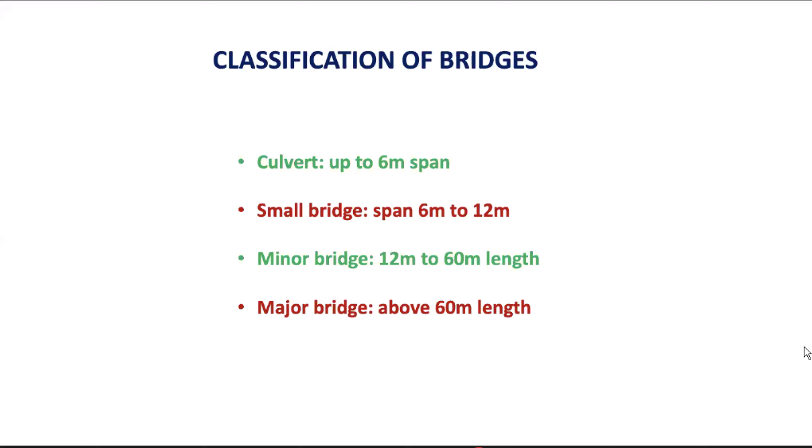Okay, what are the basic types of bridge superstructures these days? These days means as of now, latest. In the past, not so common now, but we do have some slab bridges, which are RCC or PSC slab, like a solid slab, as in a building. You have a slab which may span from, let's say, 5 to 10 meters in the case of RCC, maybe 10 to 15 meters in the case of pre-stressed concrete.

But somebody may wonder why not more than that. You can have more than that, but the cost goes up. Material quantities increase heavily. Earthquake effects also increase because the inertial mass increases. So it's because of those practical reasons that we'll go for a solid slab only for spans between about 5 meters to 15 meters, RCC or pre-stressed concrete.

PSC means pre-stressed concrete. If we have spans larger than that, and if we still want a neat and clean looking slab, then we will go for something called voided slab superstructure, which may be reinforced concrete or pre-stressed concrete. We will see some pictures of all these.

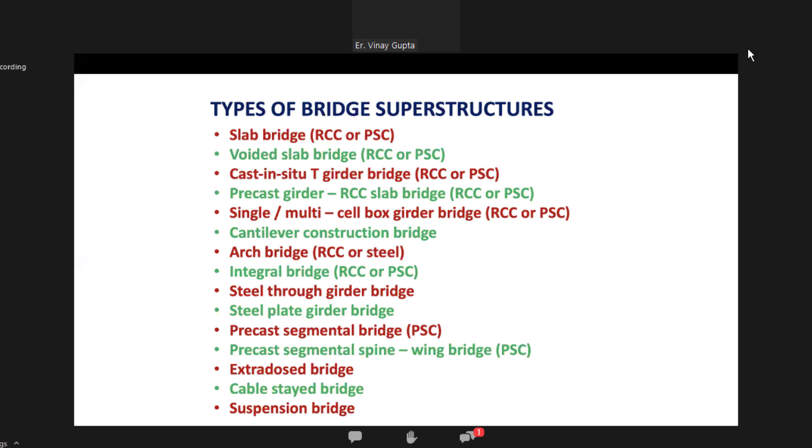If we have larger spans than 15 or 20 meters, then we can go for cast-in-situ T-girder bridge. Cast-in-situ is one category where you really put a shutter and cast, which may have RCC T-beams or pre-stressed concrete T-beam slab together. Alternatively, it can be a precast girder topped with RCC slab deck. The precast beam may be in RCC or pre-stressed concrete, but the slab will typically be in reinforced concrete, RCC.

We can have single or multi-cell box girder bridges, which again can be in RCC or PSC. We can have cantilever construction bridges where we cannot put shuttering and the spans are large. So when the shuttering cannot be placed and the span is large, we have cantilever construction. We will see some pictures as to how they are built up and constructed.

If you're an aesthetic lover, then we can have arch bridges for larger spans especially - they look very good, and can be in reinforced concrete or steel. We may have an integral bridge - integral meaning it is something like a building frame where the superstructure is monolithically connected to the substructure without any pier cap and bearings; that becomes an integral bridge, which can also be RCC or PSC. We can have a steel through girder bridge, like a truss bridge, which is all open web structure, or we can have a steel plate girder bridge, which is a solid plate having a top web, a top flange, bottom flange, and a plate with stiffeners, etc.

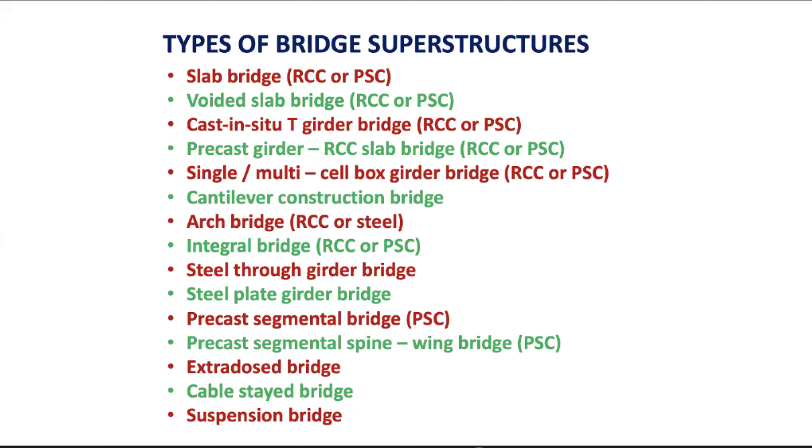We can have extradosed bridges. Here we talk of cable supported bridges. In cable supported bridges, there are three categories: one is extradosed, other is cable stayed, which you mostly hear about, and third is suspension bridge for larger spans. In terms of span range, extradosed bridges are good for about 50 to 200 meters. Cable stayed bridges are good for about 200 meters to 1000 or 1200 meters. Suspension bridges are good for anywhere around 500 to 2000 meters. Today we have a bridge with a clear span of 2 kilometers, or 2000 meters.

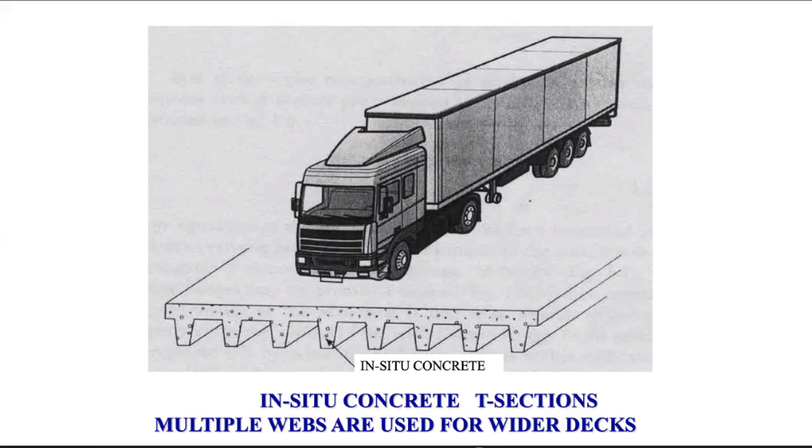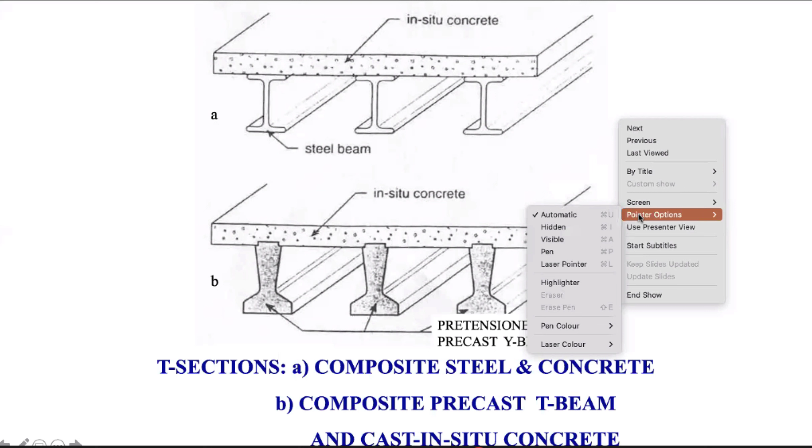This is precast concrete below, or let me put it to options. Yes, if you see below, it's precast pre-stressed concrete beams, topped with in-situ deck slab, as I said, always in-situ deck slab. And this is a steel beam bridge where you have I-girders or plate girders topped with RCC deck slab.

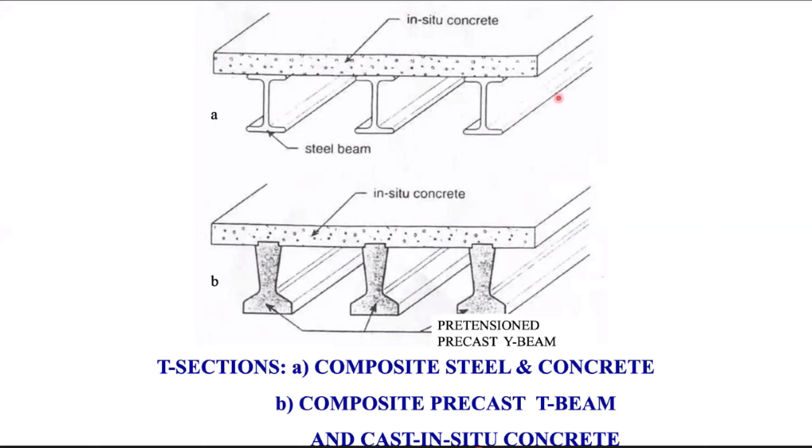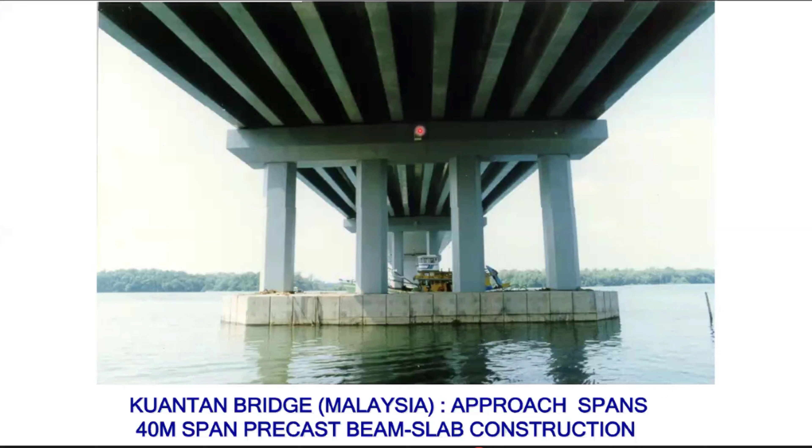This is just a picture of a 40 meter span bridge wherein the pre-stressed girders are at a spacing of 2 meters transversely, and longitudinally they have a span which is each one 40 meters in the base here.

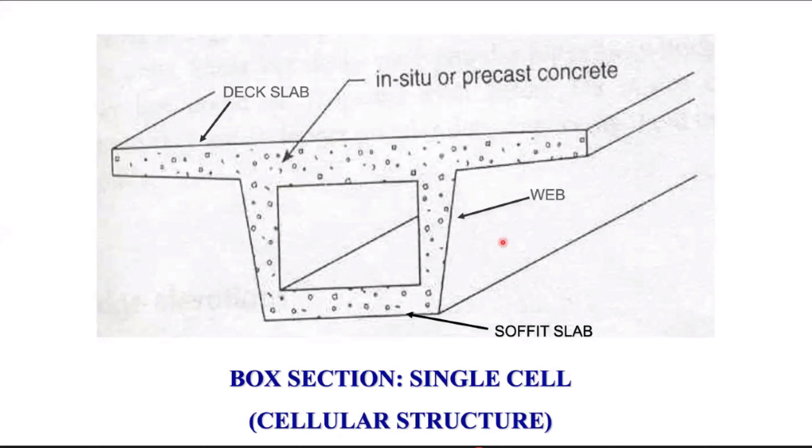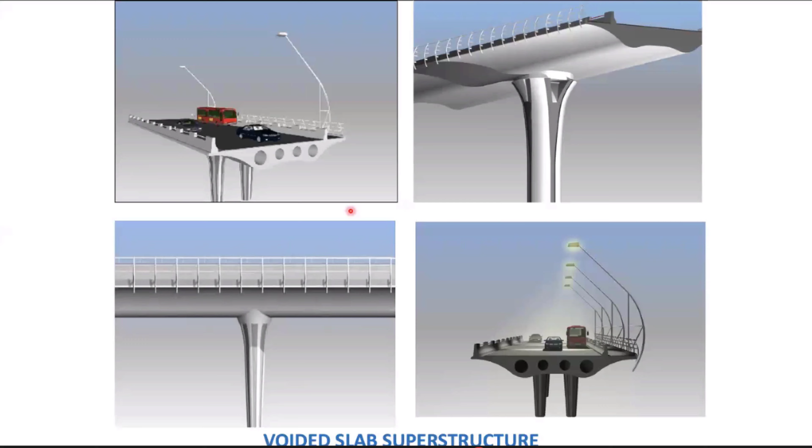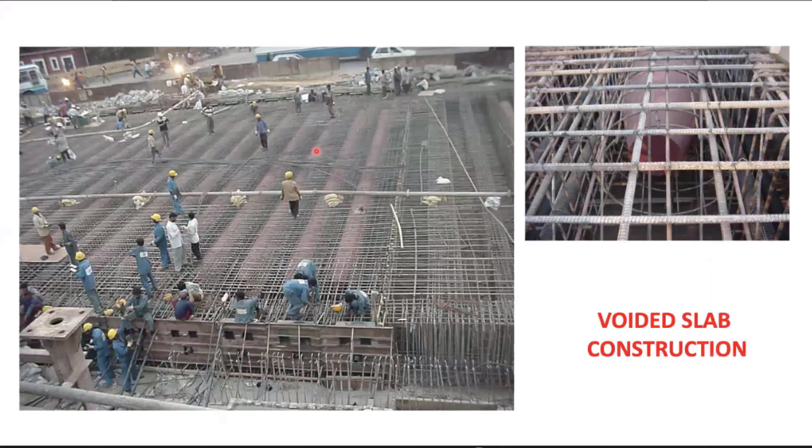Now we have voided slab. In voided slab, what happens is very similar to solid slab, or whatever shape we choose. For aesthetics, we choose a lip shape, and we create holes like this to reduce the concrete quantity and weight of the structure with the help of something called void formers. I'll show you the void formers—these are metallic pipe-type items sealed at the ends like this, and they are placed in the concrete shuttering after placing the reinforcement and other things, held tight with anchors so that they don't float when the concrete is wet, because concrete exerts a hydrostatic pressure. Once we do all this, pour the concrete, pre-stress if there's pre-stressing, or just RCC, whatever it is, it becomes a lighter structure by approximately 20% of weight for the given depth.

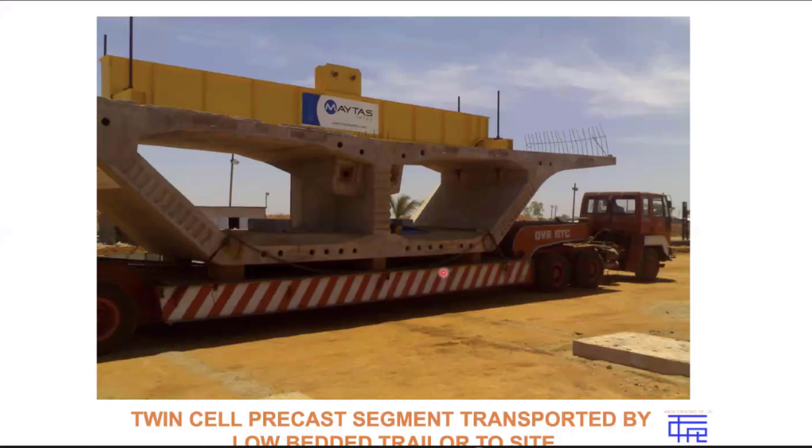Now, this is cantilever construction. In this case, each of these piers is the height of a Qutub Minar, 70 meters. If I start providing shuttering or staging of 70-meter height, the staging will fly away with the wind towards the valley, and such a tall staging will have its own stability problems. So what we do is construct some part over the pier with shuttering in situ.

Thereafter, we erect a formwork traveler, one on the right side, one on the left side, for cantilever construction. With that formwork traveler, we cast in situ or precast one segment, normally about 3 meters, though it can be slightly more or less.

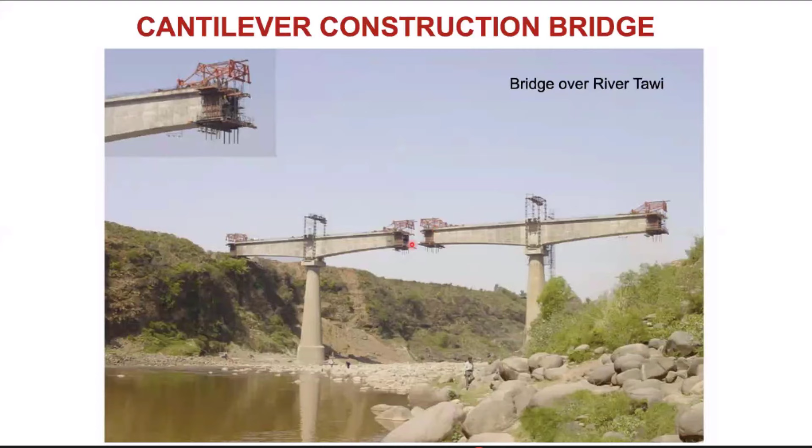And then we pre-stress it. Thereafter, we cast the next segment by moving the formwork traveler away from the center, doing the pre-stressing at every stage. Once it reaches the center, we put a hanging shutter, place reinforcement on it, pour concrete, and the job is done.

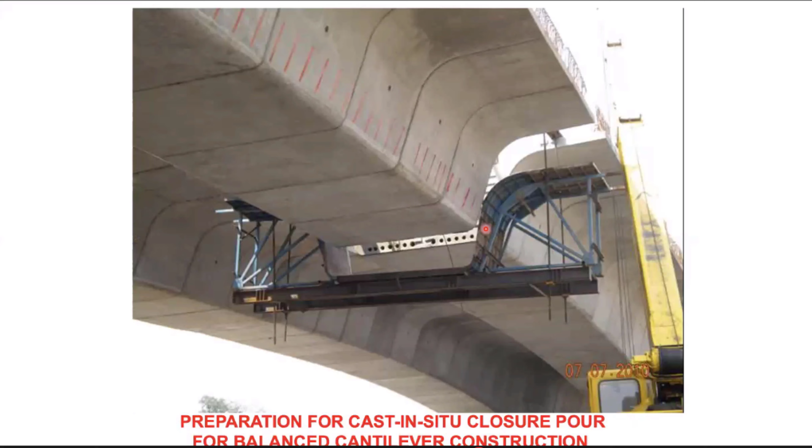Now, about the arch, if you've studied this in college, you'll know that the arch takes vertical loads through a flow of forces or stresses as membrane forces. Membrane means it forms two components of the vertical load, along and perpendicular to it, and they balance each other. So finally what's left in the arch rib is only axial compression, which makes the arch lighter, cheaper, and aesthetic.

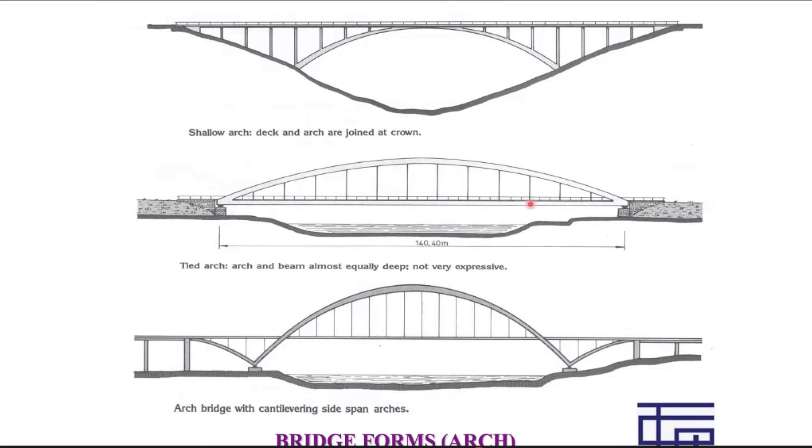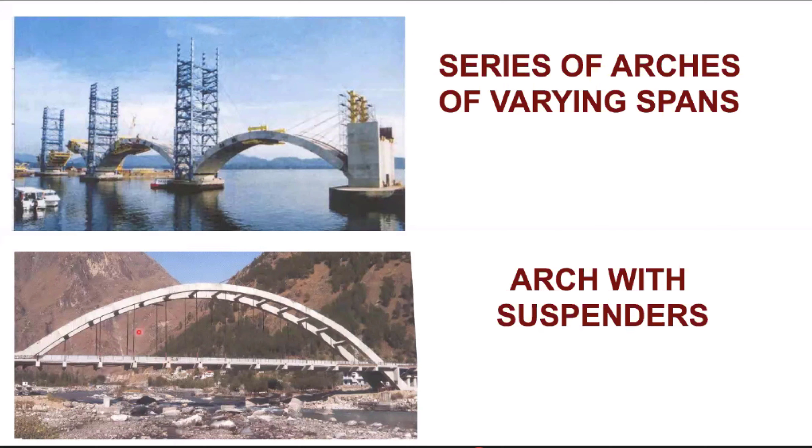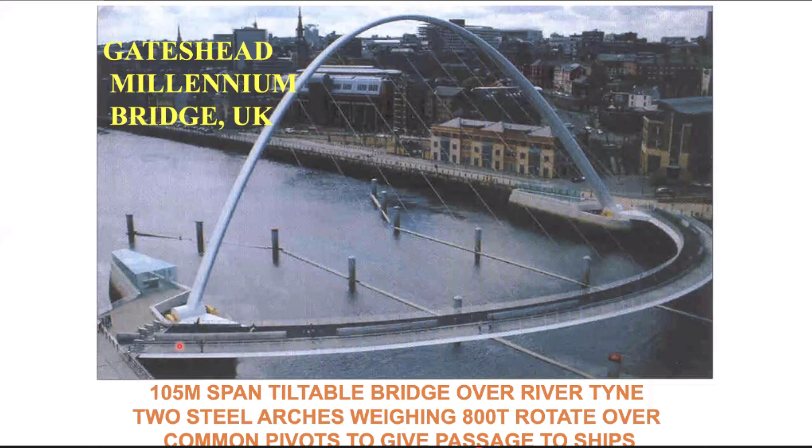Now we come to another form that we discussed, integral bridge. If you have a structure like this - this is actually Kuala Lumpur International Airport, which we designed this bridge for a long time back - if you have a structure which is curved like this, and you put it on two bearings transversely, then the structure being so sharply curved, it will fail in stability. If it topples, bearings will go into tension.

So to avoid that, we have made these piers integral to the structure without any pier cap and bearing. It looks aesthetically good too. It avoids bearings, which are sometimes a source of problems, and it becomes stable as we want it to be. This is a ramp through which you go to the airport before you alight your car.

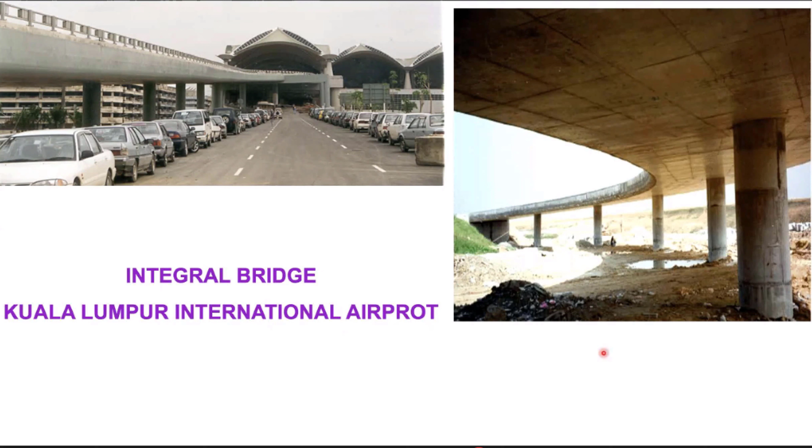Look at another interesting integral bridge. Now in this case, the piers - let's say if it's a single pier supposing - is not at 90 degrees, it is at 20 degrees. So the pier is almost in the direction of the bridge, just missing it by 20 degrees. The skew, as we call it, is 70 degrees as opposed to 0.

Now in these cases, when a bridge rests on the pier and bearings, it will have the tendency of lifting up - not toppling fully, but lifting up - and creating problems in the bearing forces going negative. Other bearings will have excessive vertical load, because this will be a balancing out situation. So we have made it integral with the help of multiple piers, 5 numbers of piers at each pier location, because the skew was a must due to traffic reasons.

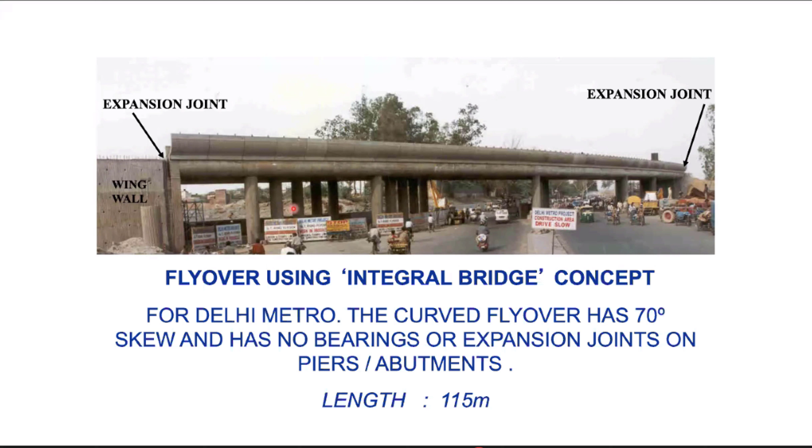Otherwise you have a steel plate girder. In the steel plate girder, you have a solid plate with stiffeners, bottom flange, top flange, and on top of that you put a concrete slab which acts as a deck slab. The advantage is that this looks neater, cleaner, and better aesthetically, but it cannot take too big spans. A truss girder could take even a span of 200 meters, but a steel plate girder will not be able to be designed for more than 50, 60, 70, or 80 meters. That's about the maximum - beyond that it becomes too expensive, too bulky, too wild.

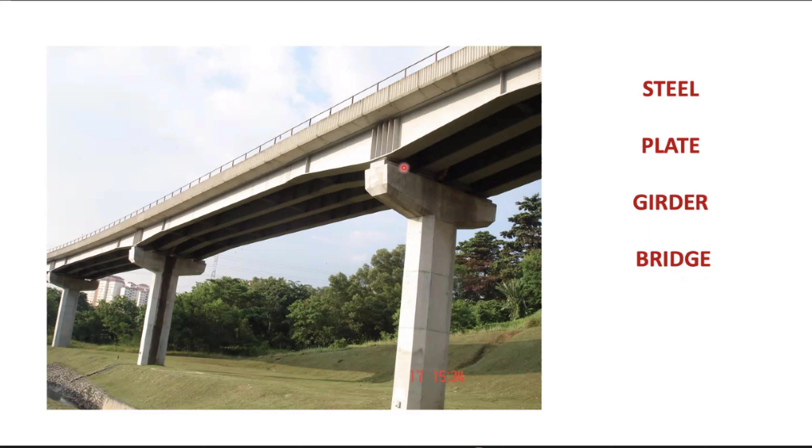Now we talk of precast segmental bridges. This is what we see day in and day out in our practical lives when we pass through cities, for metro construction, for flyovers and all that. And in your Pune also you have several of them. Mr. Lema is in charge of several precast segmental railway bridges and metro bridges.

So in precast segmental, what happens is that we cast concrete segments in a casting yard. In the process, the quality is also better because we have better control in the casting yard. It's like a factory in a way, producing the concrete segments for you. Then we bring those segments and assemble them for each span at a time. Assembly can be in two ways.

One is underslung assembly, wherein you have a launching girder which is below and segments will come on top of it, as you see in the right side picture. Here is a portal that lifts a segment from the trailer, places it on the launching girder, lifts the next one, places it on the launching girder, and assembles all the segments. After that we apply epoxy resin - epoxy glue, araldite type of thing, more like araldite only - and then you put some pre-stressing, etc.

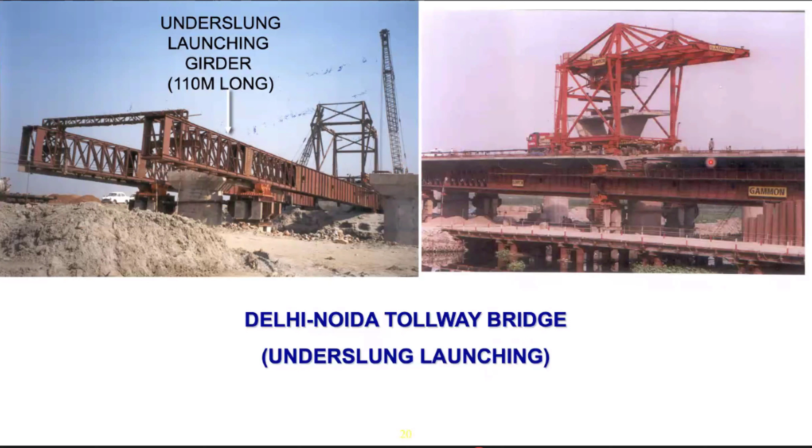The other method is to go for overhead. In overhead, what you do is have an overhead launching girder, and with this launching girder you suspend the segments with the help of wire ropes - you suspend the segments of a span of segments. Thereafter you do the same process of epoxy again in place.

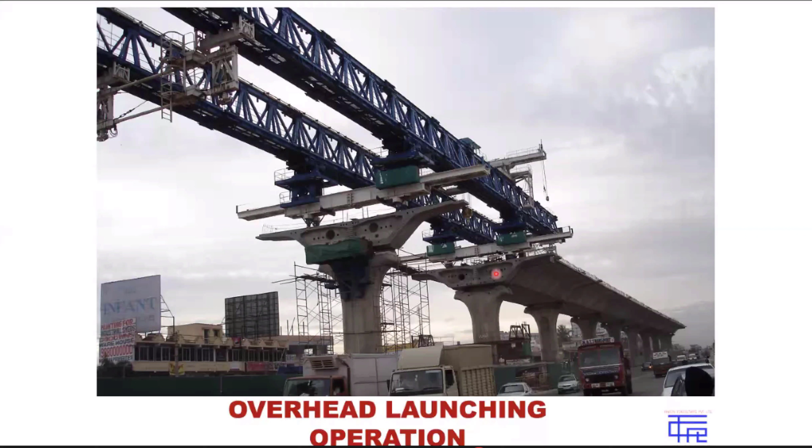This is one picture taken from a DMRC project done about 15-17 years ago. We use an overhead launching system because it's segmental, you can see the joints every now and then. Each segment is about 2.5 to 3 meters long in this case, and at the joint, epoxy resin is applied.

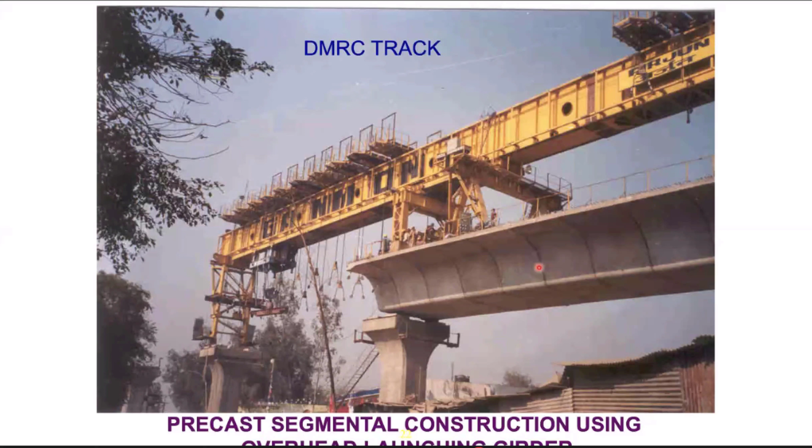Now, an enhanced form of precast segmental is even transversely precast segments. This is an example where the problem was the width of the road amidst traffic running there was not enough to handle a 6-meter wide segment, 3 meters long, traveling from the casting yard to the erection site. So they decided to limit the width of the segment to only as much as what is called the spine. After all the spine segments, 3 meters each, are placed pier to pier, they're pre-stressed. Thereafter, you bring in the transverse wings, as we call it, the spine-wing construction. These wings are brought in through cranes, and after applying a concrete stitch or epoxy stitch, you apply transverse pre-stress to make it one.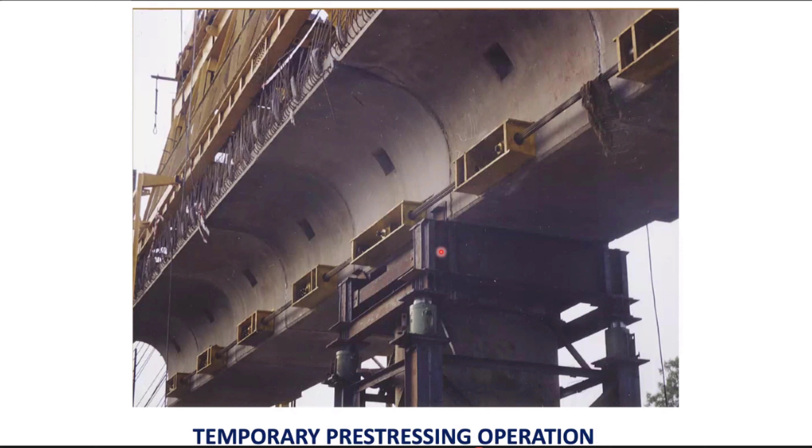Once you've applied the epoxy, you first apply a temporary pre-stress in such a way that it gives a more or less constant compressive stress across the joint of about 0.3 MPa, and keep it for 24 hours with the help of these temporary systems. Thereafter, you apply the internal permanent pre-stress, which may be as high as 30, 40, or 50 times that 0.3 MPa, and remove the temporary pre-stressing arrangements at that stage.

Now come to the cable-supported bridges. In cable-supported bridges, the first category, for smaller spans of 50 to 200 meters, in fact we are now preparing a code on this, an Indian code, is the extradosed bridge. In the extradosed bridge, the height of the small pylon you see is about 10 to 12% of the main span. If the span is 100 meters, this will be about 10-12 meters tall. These cables which you see look like suspenders, but actually they are not suspending cables or cable-stayed cables. They are more like internal pre-stressing that has gone outside, so these are like pre-stressing cables.

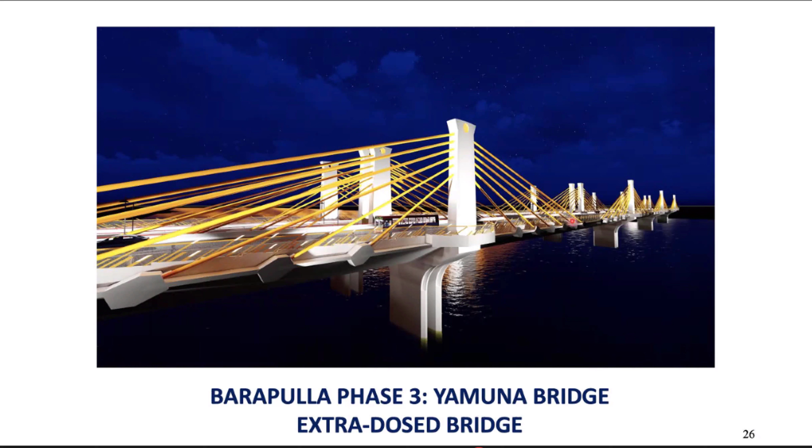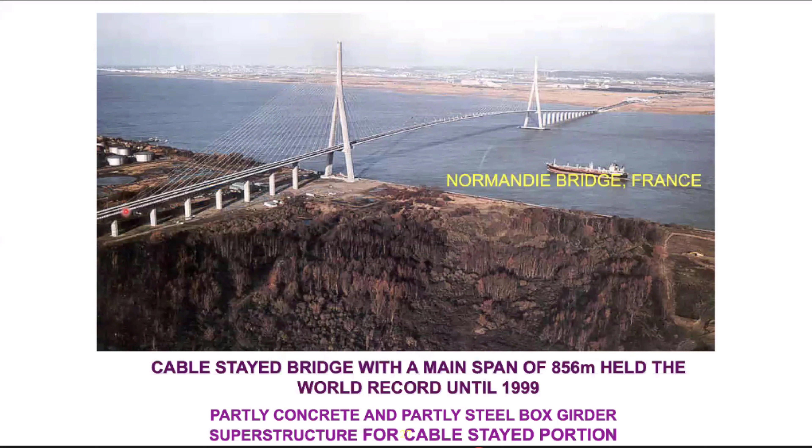How it is constructed is very simple. It's a cantilever construction where you first construct the pylon on the foundations. You then place one segment here, if precast then precast, if steel then steel, if in situ then in situ using a forward traveler. Place one segment, put the cable, place another segment, put the cable symmetrically on the other side also. You can do simultaneous construction of the other pylon till such time it meets in the middle, and there you put the central closure.

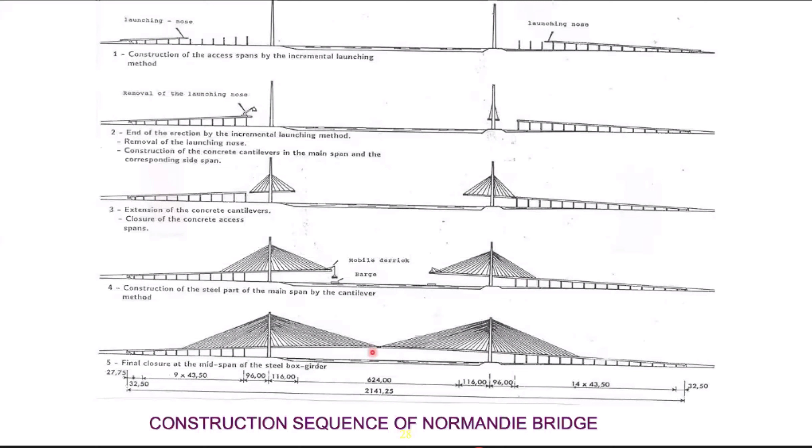Suspension bridge is a completely different technology and is good for large span bridges. In suspension bridges, what we do is we put one main set of cable, which is a suspension cable, and this main cable supports auxiliary vertical cables to suspend this bridge.

Here the pylon becomes about 16% or so of the main span in terms of height. There's one advantage. Secondly, the difference is that the suspension cable is the main cable that takes the entire load, unlike cable stayed where every cable was taking load, and these auxiliary cables take their share of the deck load. It's very different, and with this technology you can have spans up to 2 kilometers unsupported.

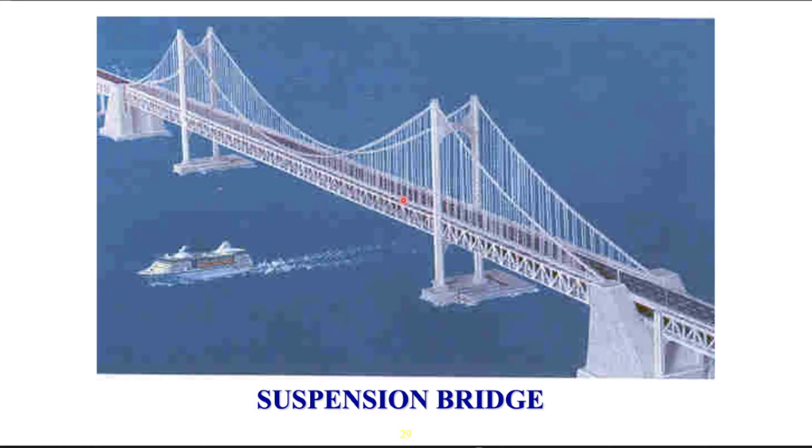This is an example of that bridge which still holds world record. It was constructed in 1998. It has a steel deck of 35 meters width, a span of 1991 meters precisely. It has 300 meter tall steel pylons, and it is in Kobe, Akashi Strait of Japan.

This span is about a kilometer, 2 kilometers, and a kilometer, so it's a 4 kilometer long bridge. And the ropes that you see, the cables, they are also 4 kilometers in length. They have a weight which is, each one has a weight of 40,000 tons.

So the big issue or big challenge for the constructor was how to carry this cable across the seabed in the strait. Strait means a narrow stream of water in the sea. What was done was that a combined power of high capacity helicopters and high capacity barges working in the sea and above, they were pulling these cables from one end to the other end across the seabed. And that's how they could manage to pull the 40,000 tons of weight.

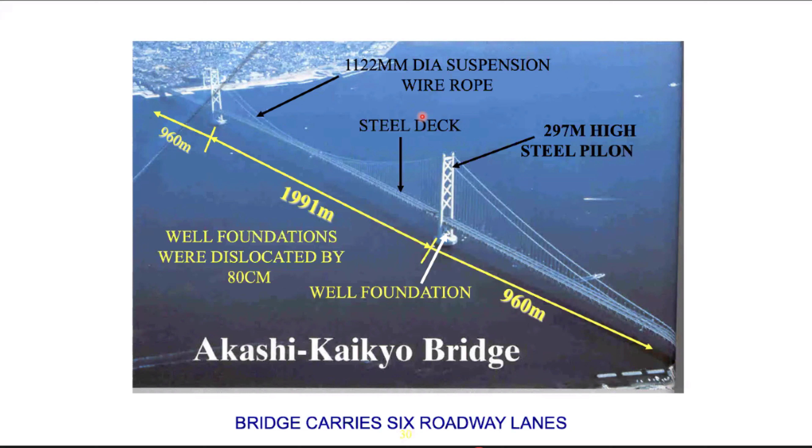Okay, so now we have seen superstructures, we go to foundations. In the foundations, we have open or spread footings, which you must have all seen in your colleges. We have pile foundations, which also you must have heard, and we will see how it looks. We also have something called well foundation, caisson foundation, and micro pile foundation, though these two are not so common in India, but they are also foundation forms. And we have piled raft foundation.

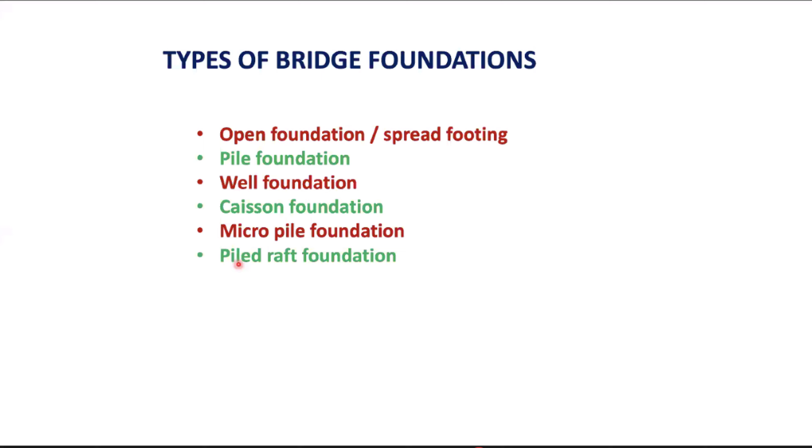Let's go down and see. So open foundation can have, let's say if it's an annular pier of a bridge, a shape like this, which can be circular, square, whatever you choose based on the economics, based on the design. It may be horizontal here and inclined thereafter to reduce concrete quantity. It may have a shape like this.

This shape is normally suitable when the width is large. Like in this case, it is for a chimney, wherein the width is almost 25 meters. In that case, it makes sense for economics etc. to taper this also and taper this as well, both sides.

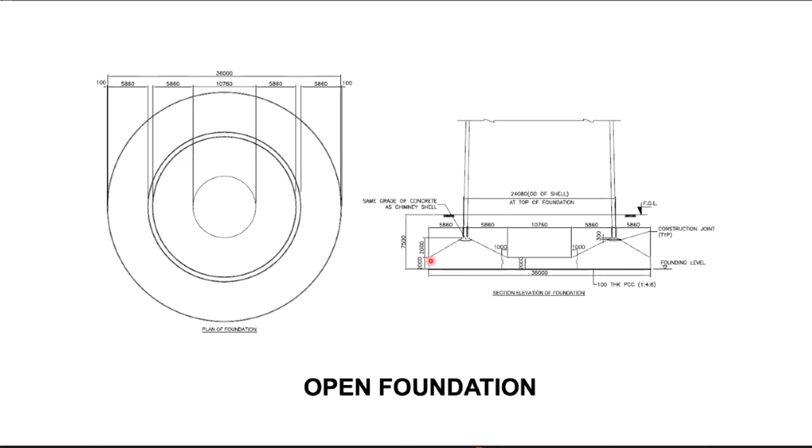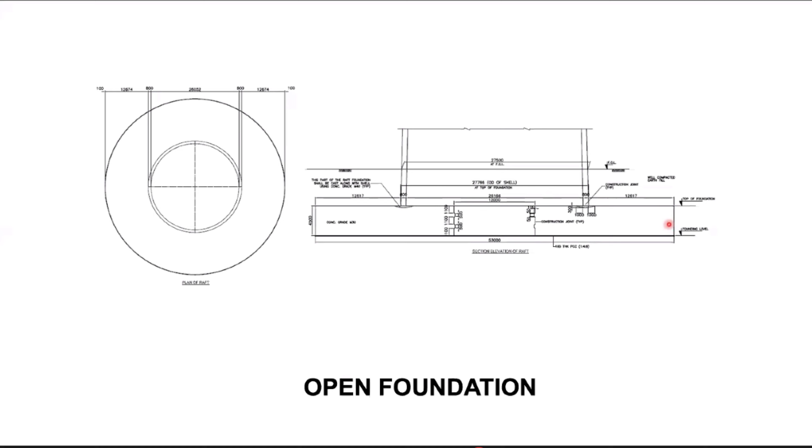There can be another type when you have a small diameter, although in this case it is not small, it is 27 meters. But if it's a small diameter like 7, 8 or 10 meters, this can well be flat. It doesn't have to be always tapered. By making it flat in this case, the advantage we got was that the maximum thickness reduced and the reinforcement reduced, even though we have gone with a larger quantity of concrete. And it turned out cheaper in this particular case when we did the analysis.

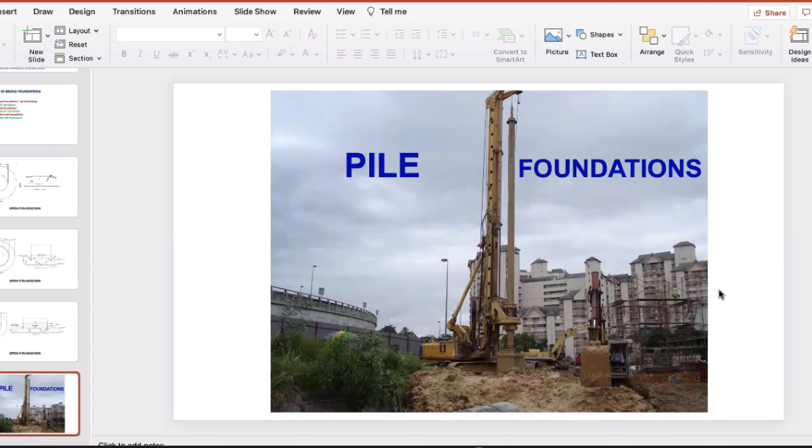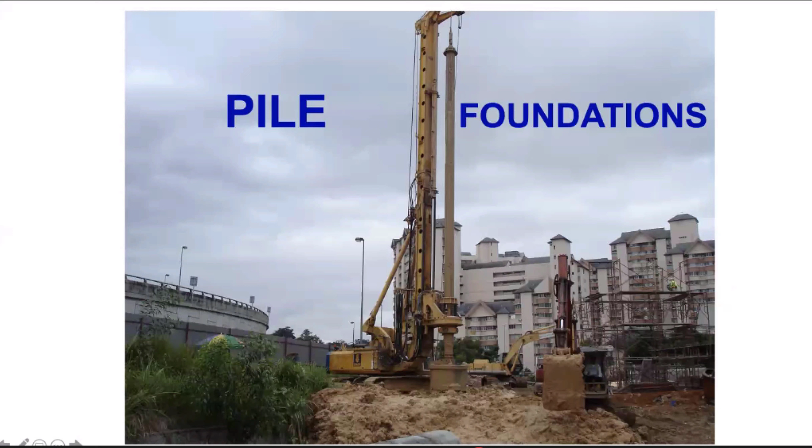In pile foundation, what happens? You have a hydraulic tool. This is hydraulically operated, which can use the shaft to rotate this into the ground, and through the rotation, it picks up the soil, it excavates the soil and picks up through a bucket which you attach to grab the soil out. Likewise, you create a hole in the soil wherein you have to place the reinforcement like this.

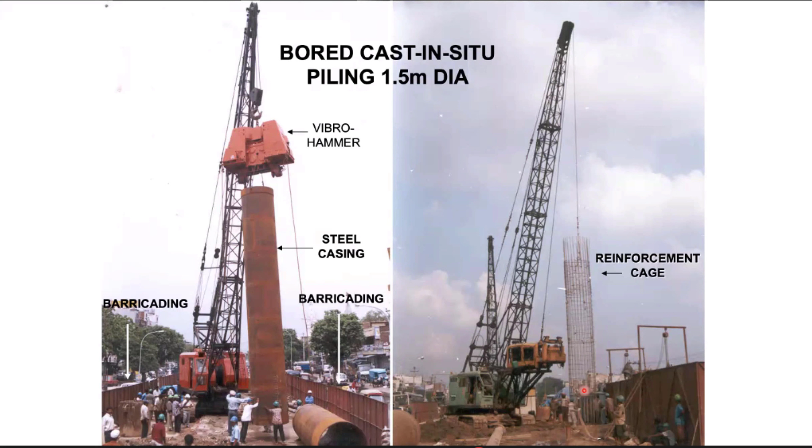You place the reinforcement, which is you lower the reinforcement, and thereafter you put a tremie. I'll explain what tremie is. And through the tremie, you pour concrete of pipe. Now this pile goes to 20 meters, 30 meters, 40 meters, 60 meters, 80 meters in Cochin we have done, and outside people have done 120 meters deep pile also.

They can give you a larger capacity from the soil, which may be weaker or whatever, especially when it is not rock, you do it more commonly. But in your Pune and Nagpur and all these places, metros are mostly made on piles. But where there's a shallower rock up to 6 meters, they go for open foundations on the rock with the high bearing capacity.

So these piles, they give capacity through the side bond that you have on the surface, and also they give you capacity from the end bearing. So end bearing and side friction, side bond between the soil and the concrete, these two give you the capacity of a pile, which is of course higher.

Now another concept, a slight refinement of a pile foundation, is the pile raft. In the pile raft, we do a soil-structure interaction analysis, wherein you take the soil as a spring, the pile as a very strong spring, and the raft as a structural member. Finding the interaction of all this, you find that about 20% of the load goes from the raft directly to the soil below, and the remaining 80% goes to the piles. So it becomes a piled raft foundation in your analysis, and once you do this, the number of piles required is reduced.

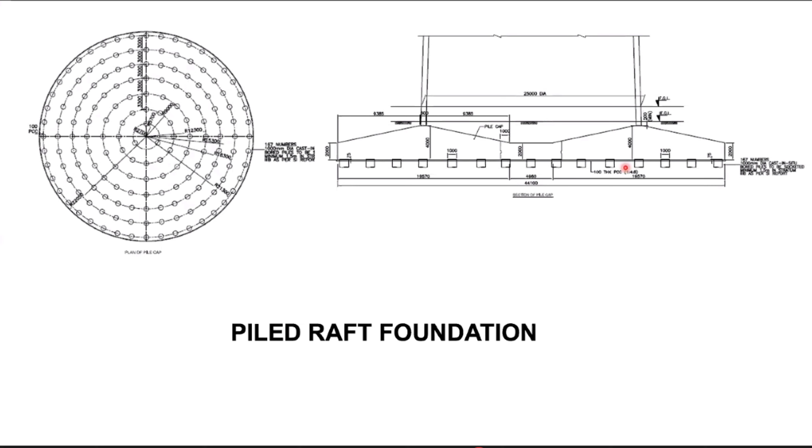We also have the caisson foundation. This is a technology used in Malaysia, so I'll probably skip this, since it's not done in India.

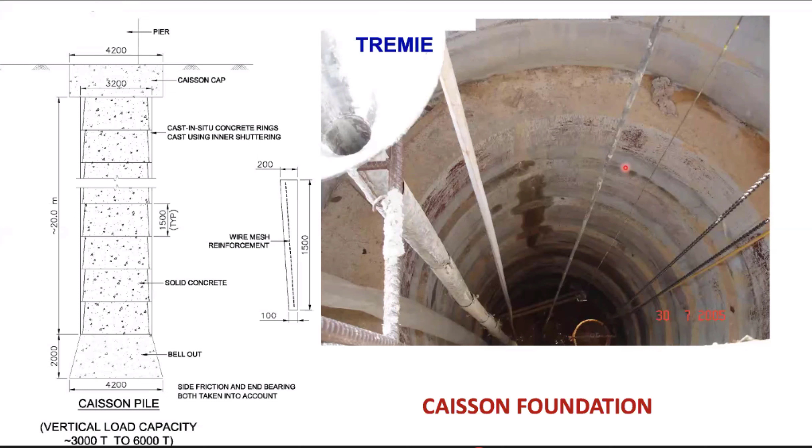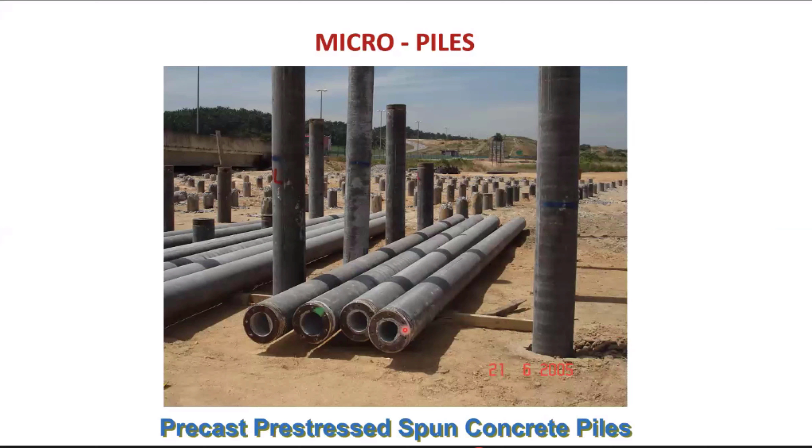These are micropiles, which are ready-made piles available in 300 millimeter and 600 millimeter diameters. They are usually high-strength M60 concrete, pre-stressed, and available in 12-meter long pieces. You bring it in and hammer it down. It's a compaction pile, so it gives you high capacity because you're hammering it down.

The advantage here is that it can take much larger vertical loads, and by virtue of having a large Z value, which may be 5, 10, or 15 meters diameter, it takes a lot of horizontal forces and the bending moments created by those horizontal forces through the side resistance of the soil. So it is like a wide pile foundation that you are inserting into the ground.

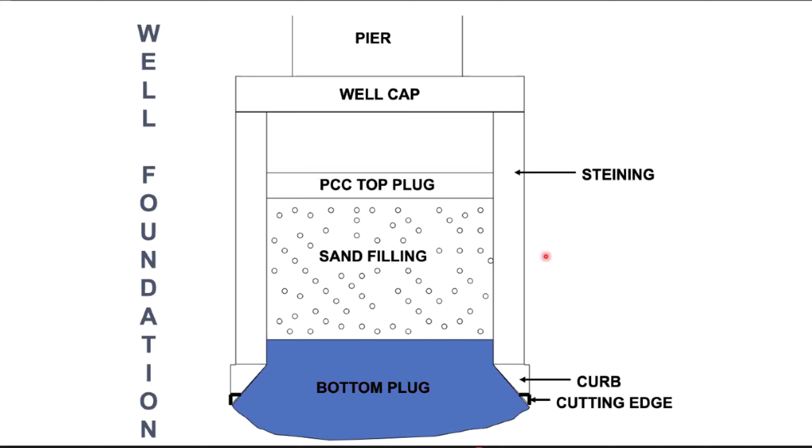This is a picture of the sinking of a well. Every time you do some excavation, the well starts sinking, then you cast more steining, then again excavate inside, and the well starts sinking further, and so on.

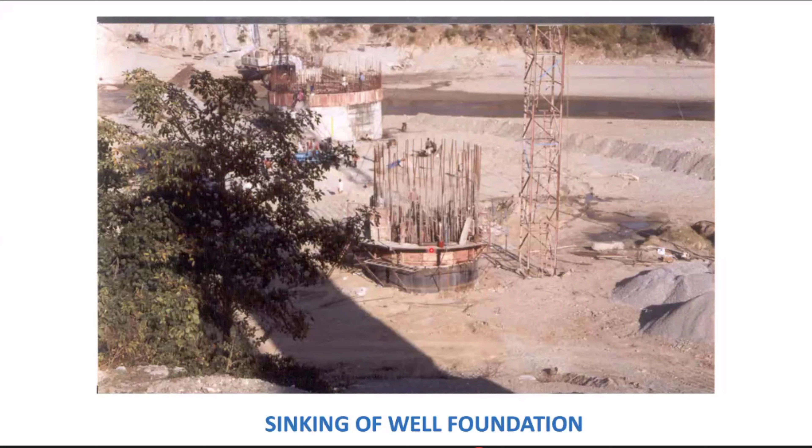Okay, now we go to piers. Piers can be solid, which is what you see in Pune Metro, or annular, rectangular, or they can be hollow. They can be solid or annular, circular, or any other shape.

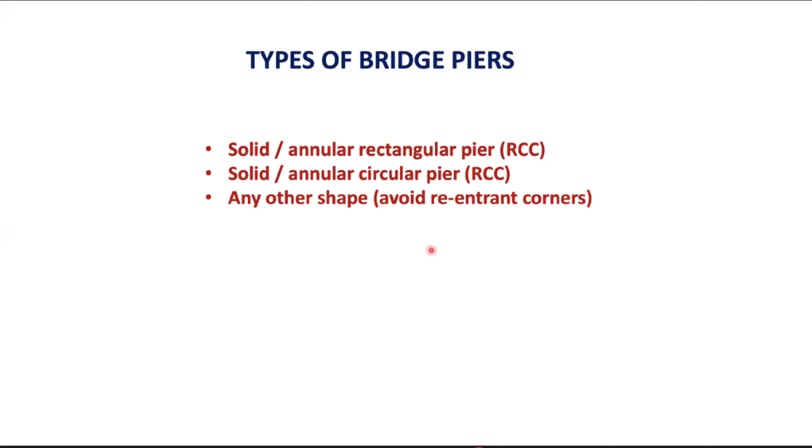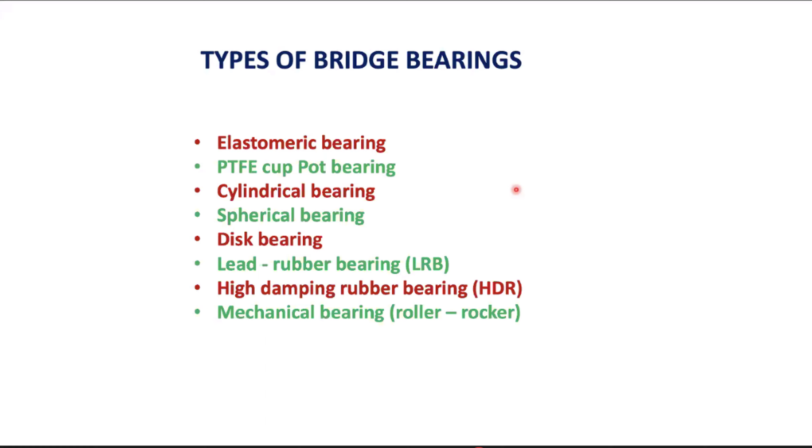Bridge bearings, the elastomeric bearings. Bearings are the elements placed between the superstructure and the pier cap for the load to be transferred finally to the foundation. We have elastomeric bearings, PTFE cum pot bearings, rubber bearings, and mechanical bearings like roller rocker, which railways use more.

In elastomeric bearings, you have an elastomer made of chloroprene, carbon black, and a few chemicals put together, forming a sheet. Inside that you have reinforcement, which is mild steel plates. You vulcanize this entire thing at a certain temperature - you'll have the handout, you can read it later, I may be rushing fast. It becomes a material slightly softer than hard steel, and elastomeric bearing works very well. It's fairly cheap, the cheapest form of bearing - only thing is it should be manufactured properly.

The next one is the PTFE cum pot bearing, which is very popular nowadays.

In the PTFE cum pot bearing, we have a bottom plate anchored to the pedestals over the pier cap, and a top plate anchored to the superstructure. Anchors are not shown. At the bottom of the top plate, which is mild steel, there is also a stainless steel plate. Below that, coming onto the side, we have the bottom plate and side walls, again circular in plan, and a piston which is also circular, and an elastomeric disc for transferring the load equally everywhere.

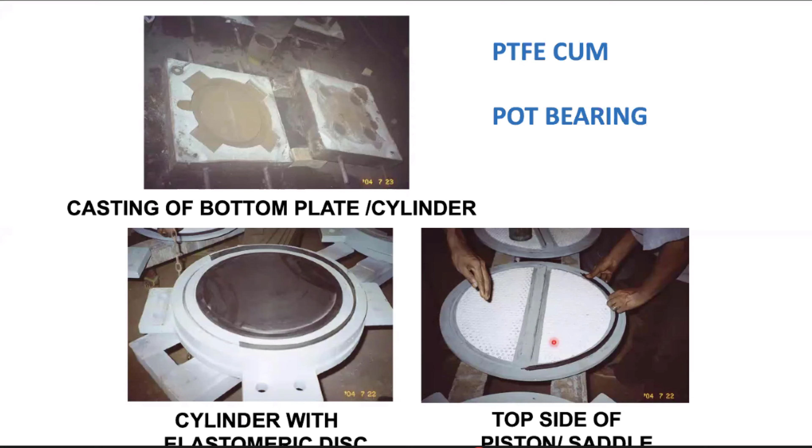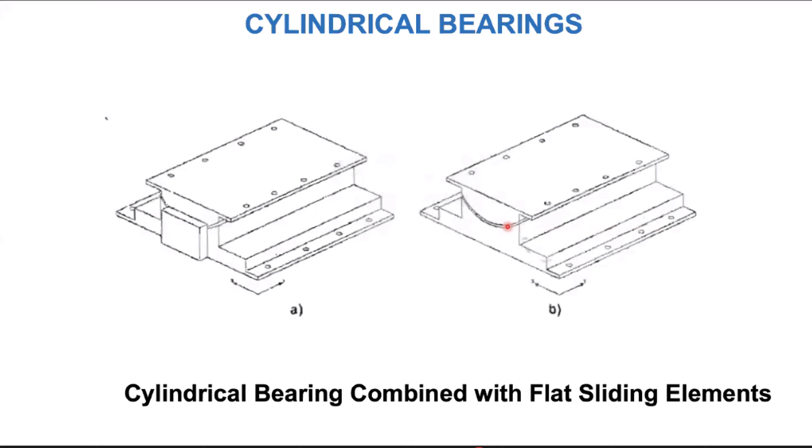Other types of bearings include the cylindrical bearing, which is not so common in India. It allows rotation only in one direction. A more enhanced form has now come, which is the spherical bearing. In this, you have a complete circular path, so it can rotate in any direction. It can also slide on a stainless steel PTFE layer, like in PTFE cum pot bearings, and this way it works more efficiently. This bearing is very recent, but it will become very common in India now.

And I think Mr. Jitendra Rathore is with us. He must be watching all this.

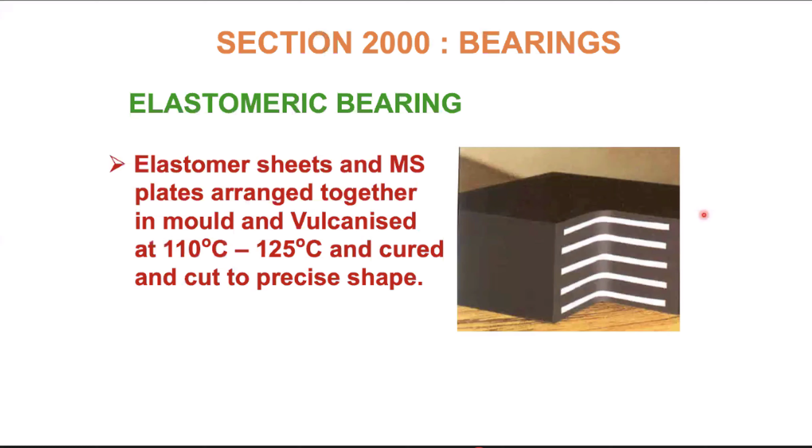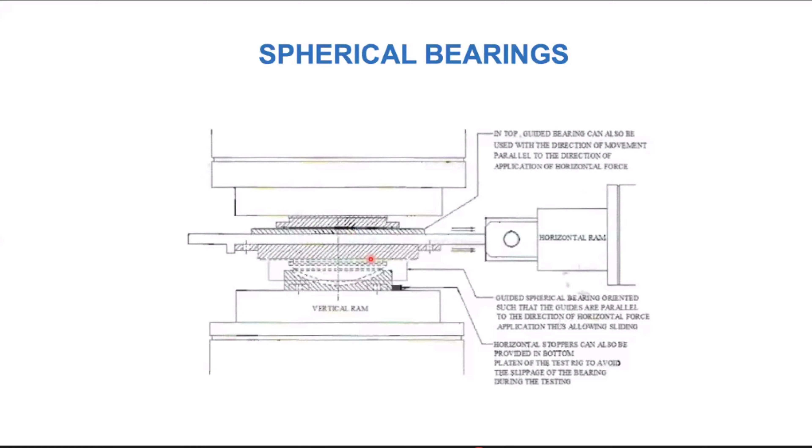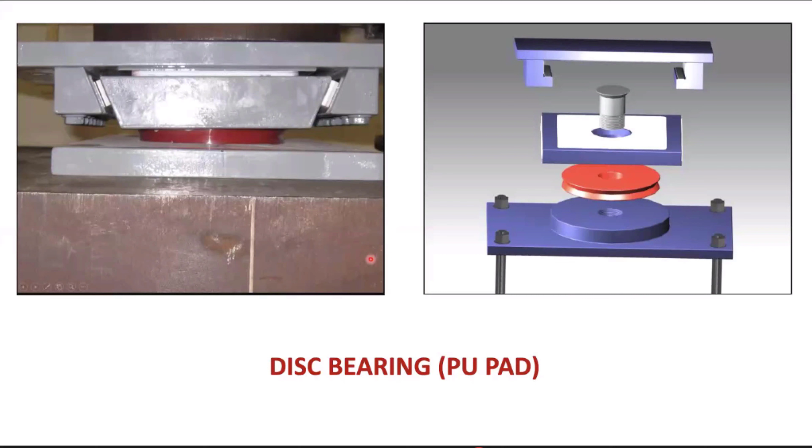If you go up and see, an elastomeric bearing will take a pressure of about 10 MPa. A pot bearing will take a pressure of about 25 to 30 MPa, and a spherical bearing will take a pressure of about 30 to 45 or 50 MPa. That is the difference, and the disc bearing will take even more, though I don't know exactly how much. I haven't gone into the details of what load it can take, but the Worli Bandra sea link bridge, being a large one, is able to take those vertical loads.

Now, when it comes to earthquakes, what we want is for the structure to somehow become flexible so that its natural time period increases, and for that we don't want to reduce the structure. So what we do is use high damping rubber, which gives a damping effect and increases the time period of the structure. Or we use low damping rubber with a lead plug, which gives larger damping, pushing the structure back to its position. Or we just use an elastomeric bearing, a low damping material, which enhances the natural time period of the structure, thereby reducing the earthquake forces experienced, even though the structure may be heavy.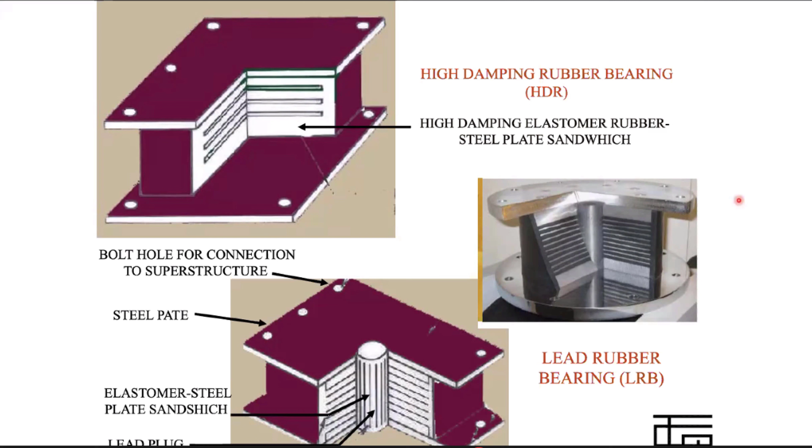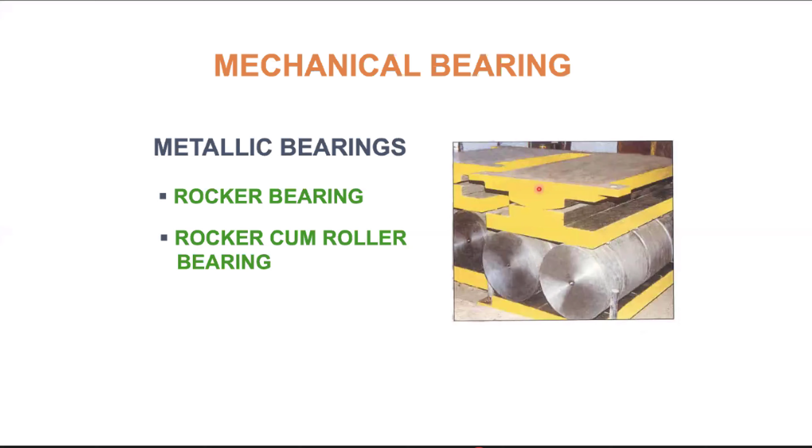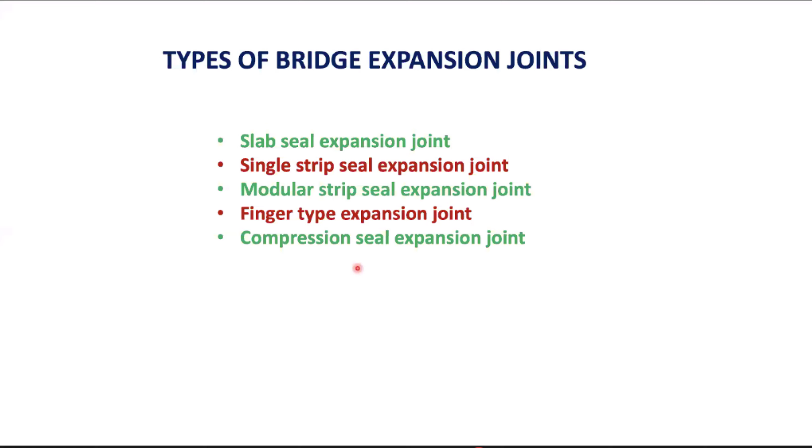Now come to expansion joints, where two adjoining spans are provided with a gap. You can't have this gap permanently because you want traffic to move on a smooth surface. So the expansion joint transits between the two adjoining surfaces of the deck slab of a bridge. We have slab seal type, single strip seal expansion joint, modular strip seal, finger type, compression seal, and we'll see each one of them. This is the most common expansion joint nowadays, the strip seal.

In this, you have a metallic extrusion of a specific shape.

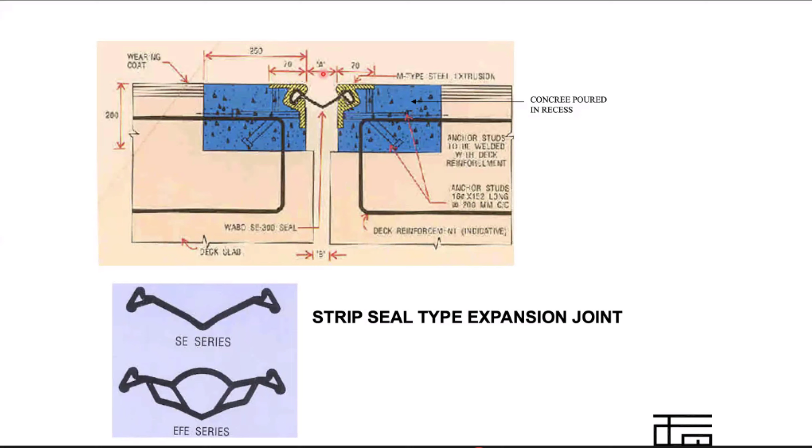When you have a larger movement, the limitation is that this movement, plus and minus together due to expansion, contraction, temperature, shrinkage, creep, etc., if it's up to 80 millimeters, this is fine. Otherwise, you have to go for modular strip seal, which you can see the shape here.

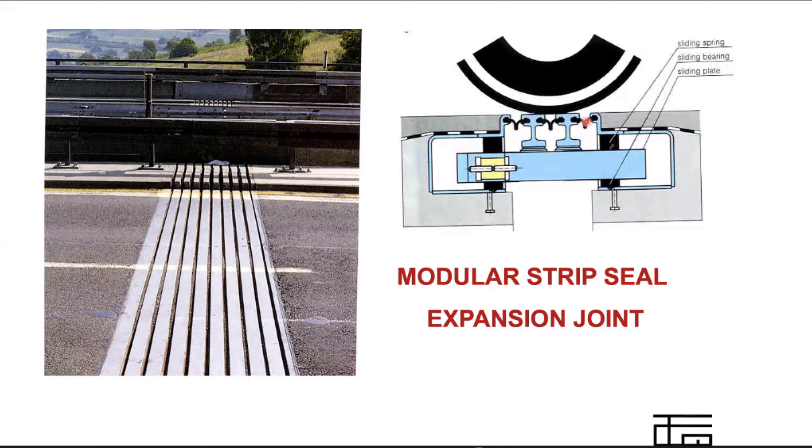Each of them can take 80 millimeters movement, plus and minus added together. So finally, you require a number of them as the length of the bridge is, which has to be bridged.

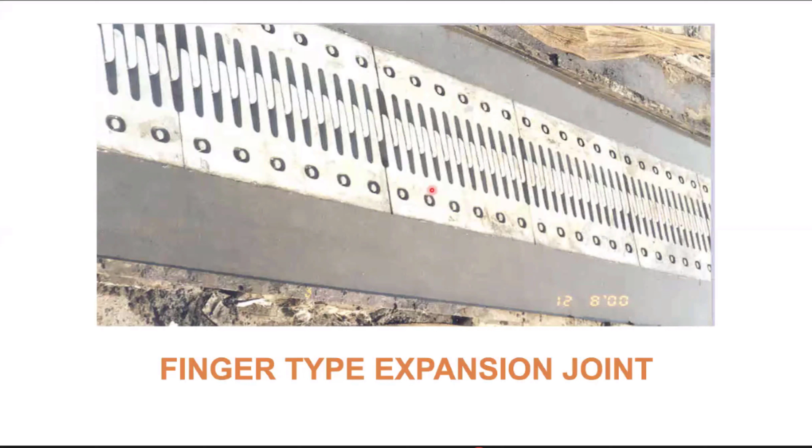In finger type, you have metallic fingers, as the name suggests, and they just bridge the gap. The vehicle can move over it without any problems. But the finger type expansion joint itself, being in metal, is a little prone to corrosion, etc. So we have to worry about those parts in terms of durability.

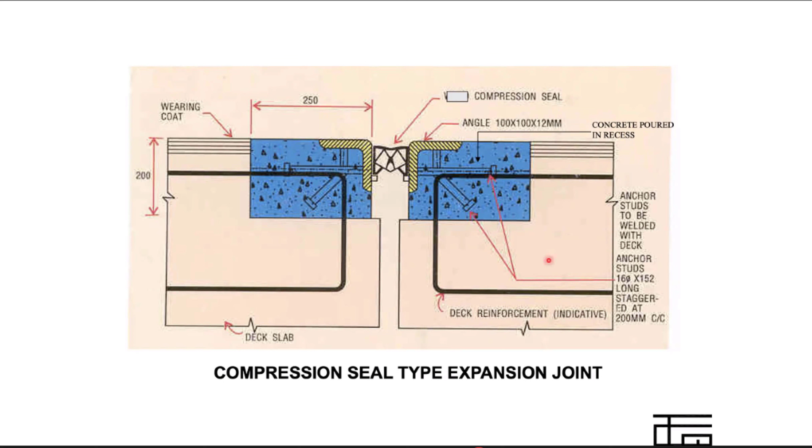We have box seal, wherein compression seal, we have this kind of elastomeric box which can expand and contract. But looking at the shape itself, we can make out that this can't take very large movements. It can take movements plus and minus together only up to 40 millimeters.

Now we talk of the reinforcement and pre-stressing. Reinforcement is passive reinforcement, whereas pre-stressing is active. Let me just check how many slides, because I should not be missing my slide. 60, okay, we have 5 more, fine. So I'll go to this.

In pre-stressing, what happens is you put some kind of a metallic cable running along the tensile bending moment profile, and stress these cables and lock it to the structure to give compression where we have tension on account of the bending moment.

Let's say if it's a 2-span beam with the supports, you have tension here, so you provide the pre-stressing here. You have tension there, provide the pre-stressing. You have tension there, provide pre-stressing there.

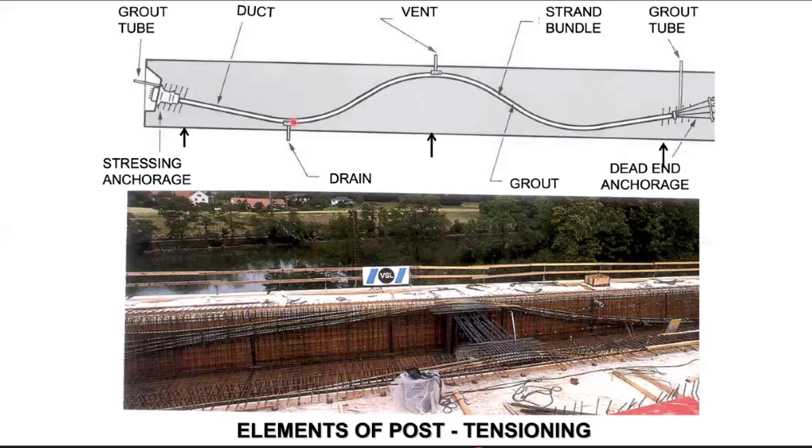For doing this, we provide ducts that look something like this, metallic ducts or rubber ducts, the plastic ducts, high-density polyethylene. In the ducts, we place pre-stressing hardware. Hardware means, first of all, we have the duct, which is placed in the concrete while casting. After that, we bring in these pre-stressing strands.

Now here, you see, this is something called a cone. This is an anchorage cone, which looks something like this. And this is also placed till here. Concrete line is here. After that, you put the pre-stressing cables, and then you put the anchor head, we call it, which has conical holes.

In the conical holes, we place this kind of conical wedges. These wedges have serrations inside, like teeth inside, so that once we have stressed a cable and hammered these wedges, they start biting onto the strand to make sure that the strands don't go inside. And they hold the force onto the concrete.

After that, we come and we grout all this with the cement so that it's permanently done and also protected against corrosion. Now, as regards to strands are concerned, strands comprise 7 wires, central wire and 6 outer wires, and this becomes one strand.

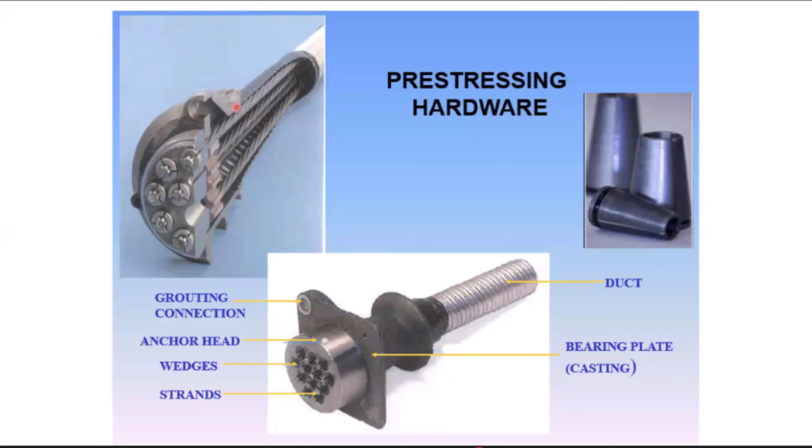And when we have number of strands put together, it becomes a cable like that. So this is one more picture. I'll probably skip this. This is how it looks.

Now, pre-stressing gives a reduced span to depth ratio, reduced deflections because the cracking is avoided. You have compression generated by the pre-stress, enhanced serviceability, therefore more durable and long-lasting concrete, reduced construction time because once you pre-stress after 3-4 days, you can move your shutter in the case of cast in situ. You don't have to wait for 15 or 21 days, unlike a large span cast in situ RCC. And enhanced aesthetics because you have a slender structure due to pre-stressing.

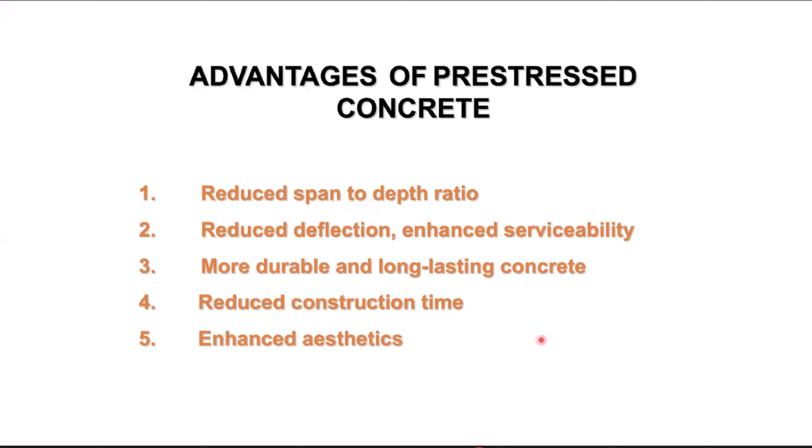Okay, 1 or 2 more slides. Aesthetics. Now, nowadays, since the bridges or the flyovers are in the public limelight, they are in the urban areas, and we also want to see something which is aesthetically pleasing. A lot of thrust is going in making the structures pleasing.

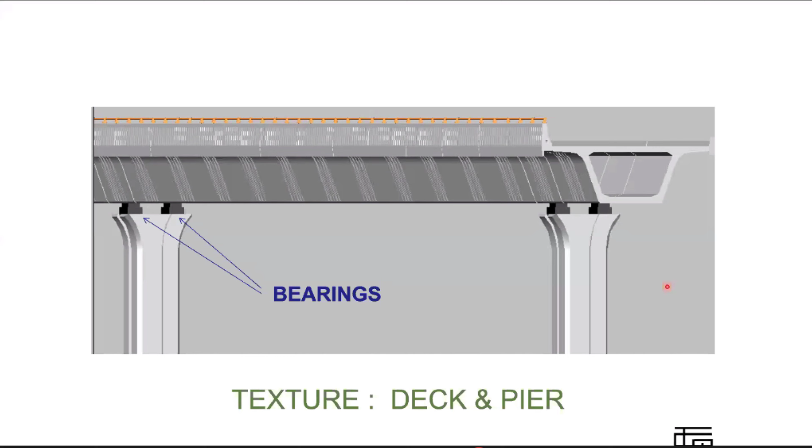So if you look at this expressway, which is going from Bangalore to Silk Board Junction to Electronic City, 10 kilometers long, there we have provided rubber liner in the shutter while casting the precast segments to give this kind of interesting shape to the segments. So when you see from below, you will see a better shape compared to just the plain concrete.